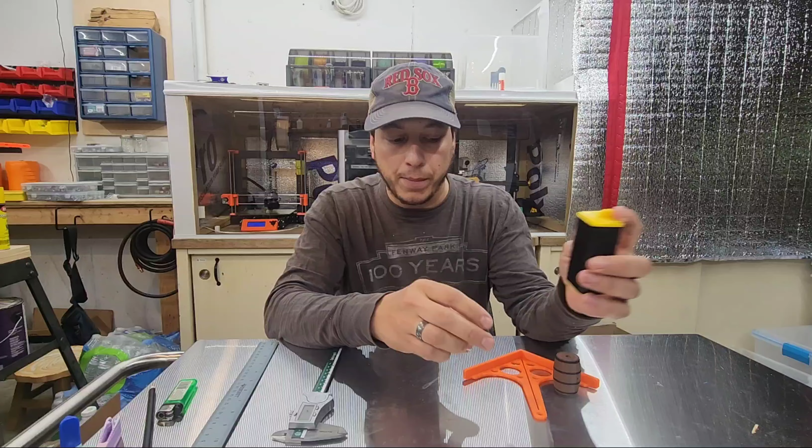You can always download files and print things with your printer. You can get a printer and print some pretty fantastic stuff that other people have designed. But until you get to the point where you're really thinking, what could I use, what could I benefit from, it's kind of like going into Walmart. You buy what's convenient, you buy what's there, and if they don't have what you need, you don't get what you need.

But sometimes a little bit of learning on something like Onshape and Tinkercad can really take you into a whole new direction of 3D printing, and really unlock the other 60% of the potential that these machines behind me have in making your life, your household, your whatever easier, more convenient, and just better. Let's get into it.

All right, so let's use a very simple and very basic example that makes my life easier: organizational things. These are very easy to design, very easy to print. They take minimal effort, and I'm going to show you guys exactly how I do it on the computer here in just a minute.

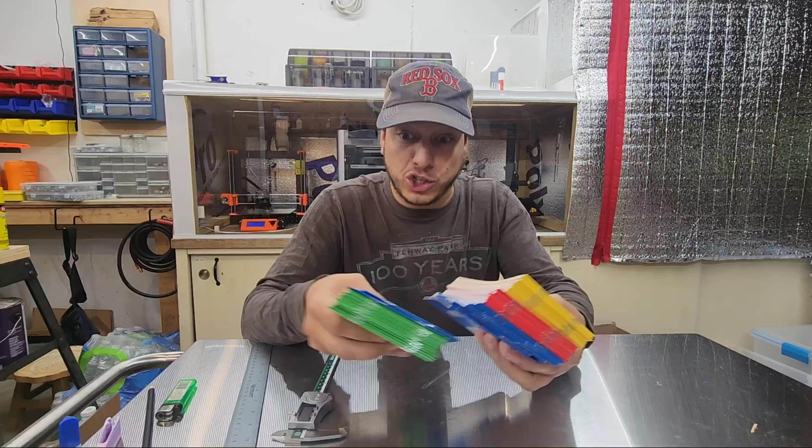But first and foremost, I've got a whole bunch of these learn-to-read books for my daughter for summer reading. She gets out of school and we're going to do a lot of summer reading. There's a ton of them, and what's going to happen? They're going to get shuffled up. That's not what I want to have happen. I want something that organizes these, keeps them sorted by reading level and everything else. Why? Because I can. That's the most important thing, is that I can.

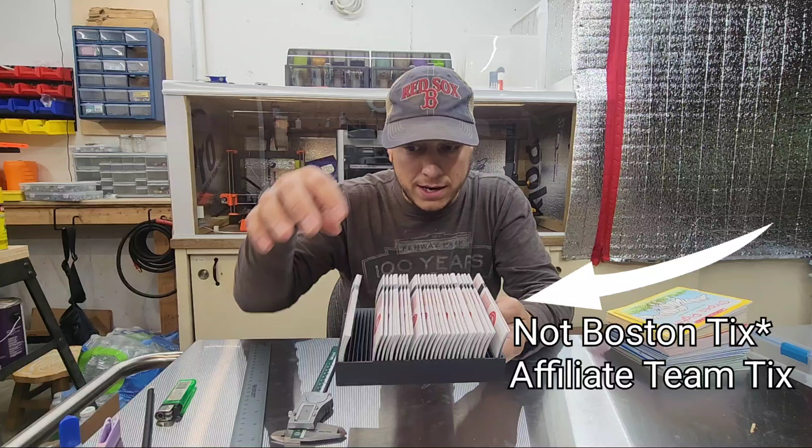So I got the idea actually because, you know, I'm wearing my Red Sox stuff today. Season ticket holders end up getting a tremendous amount of tickets for different games, and there's really no good way to organize it. You can throw them all into a bunch of envelopes and label them, but they're very confusing and difficult to go through to figure out where everything goes.

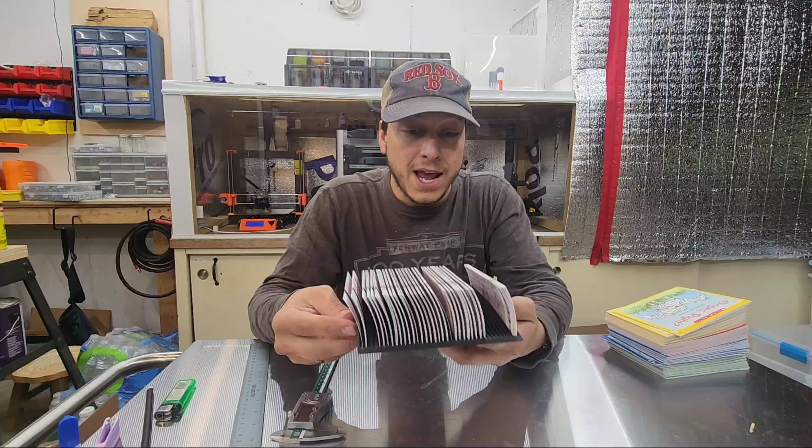I was able to design very, very easily and quickly print super inexpensively this little organizer that might not even be useful to very many other people. So I'm not going to upload this to Thingiverse, Printables, Maker World and things like that. But this is something you could design yourself very quickly and easily, and turn it into something that would work well for you. This little thing can go into a drawer in my house and make my life 100 times easier. Again, this is not something you're going to find anywhere, because it's literally made specifically for a need that I had.

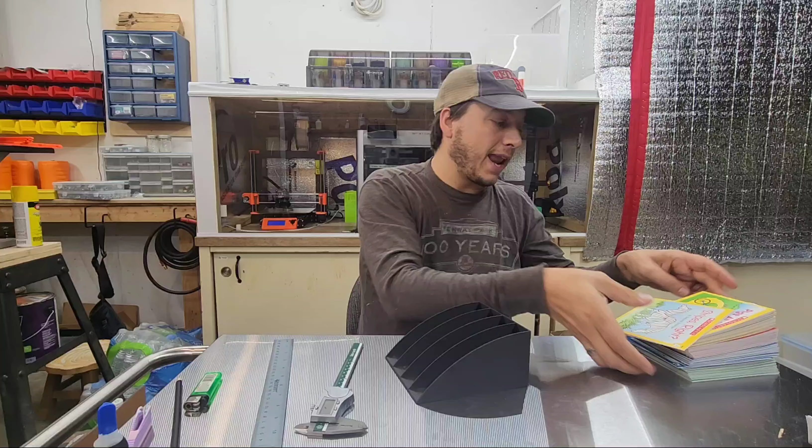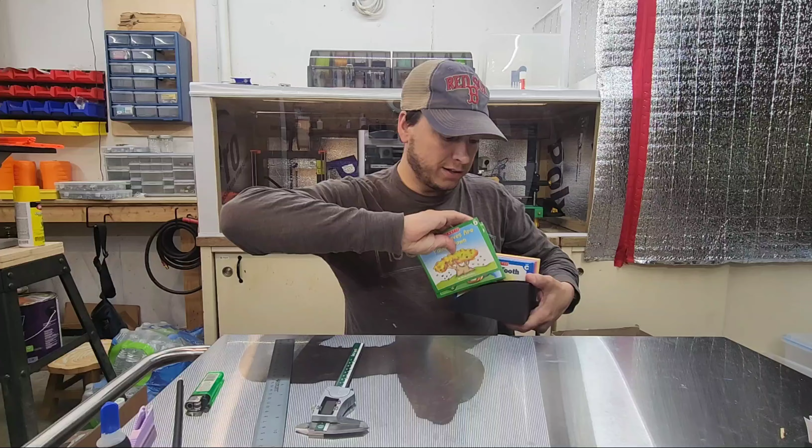So I took that same design and expanded it out, basically took the exact same thing and extended it up, made it taller. Now I'm able to actually sort books by reading level in here, and my young daughters are able to use it. They can see which ones go in which section, and believe it or not, kids are actually putting things back where they go. And this, on my bookcase, looks a whole lot better. Even with full-size bookcases, these are not falling over.

I've got a couple other use instances that I'll show you in just a minute, but most importantly, let's cut over to the computer. Let me show you guys very briefly what I'm doing in order to make these ridiculously easy organizing devices, which you guys could start doing probably within about 20 minutes of tinkering around with Onshape, which is what we'll be using, and get these things printing right now.

I've actually got a completely different version printing on this one right now. And over here I have a golf ball holder that I'm printing for a friend, because what I needed didn't exist, and with a little bit of Tinkercad playing around, I was able to make it.

I've actually got a video where I made a game ball, a softball holder for hanging on the wall, that teaches you how to make keyhole slots on the back of things. I was able to take that same exact thing for the softball, change the measurements, shrink it down, add a little bit of text on the front, and print this out for somebody else — and it's a golf ball.

Again, they didn't have what I needed, and it did not take much learning or training. I'm not experienced in this, I learned it from YouTube just like you can, and now I've got this printing here.

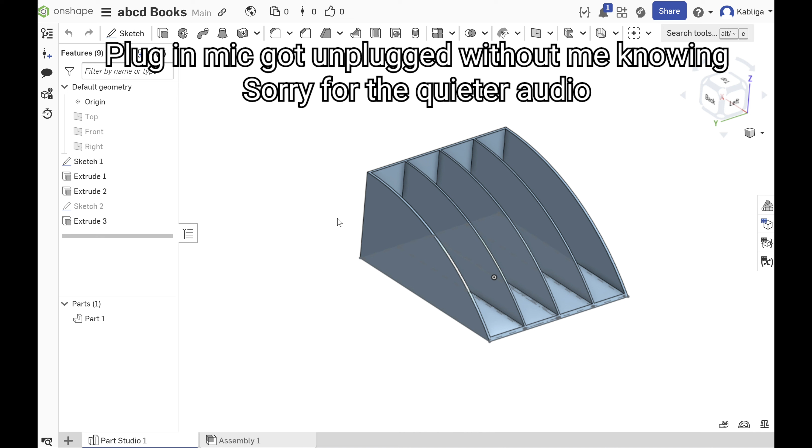This is the design of the book sorting organizing device that I just showed you guys, and let's take a quick look and see what exactly I did to make this happen. Let's roll back the bar up quite a few steps and see exactly what's going on.

So it started off with a very basic sketch. You'll be able to see it right here, where I measured the total width of the books that I needed them to be from front to back, and then the total width from side to side of having every single one of the books lined up with enough room in between.

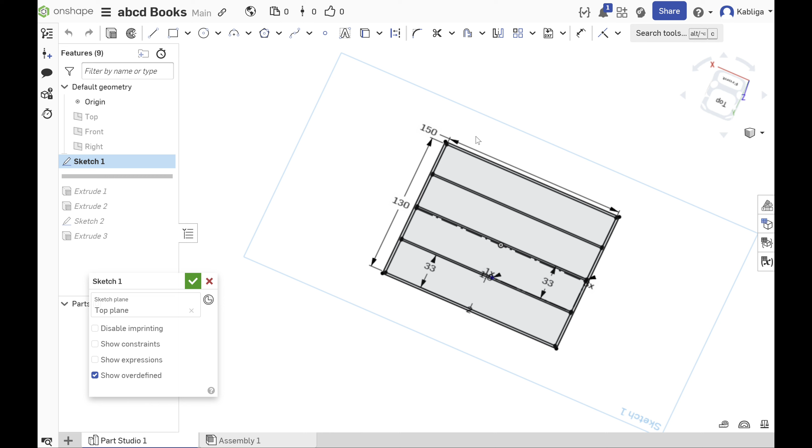I did use a line with an offset tool, and then I did a linear pattern to have this repeat. I ended up making them 33 millimeters apart, and that actually worked perfect for me. I did make one of them just slightly thicker because one of the sections of books was a little bit bigger. So let's roll this back and show you guys what happened afterwards.

The very first thing I did is I extruded the exterior perimeter lines, and what that did is give us a box with no bottom. So really it's more like a sleeve.

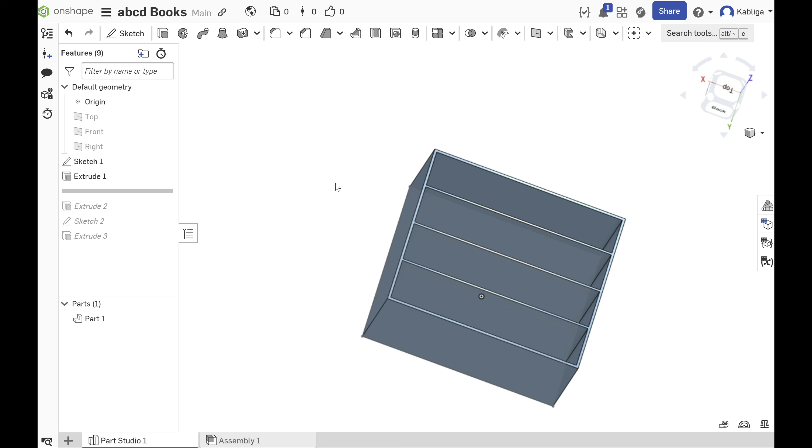Now I'm sure this would work for some people, especially on a bookcase, but it wasn't really what I was looking for. So then I extruded the bottoms of each one, only a couple millimeters, so I end up with a box that is a sorter box. And again, this could be enough for a lot of people.

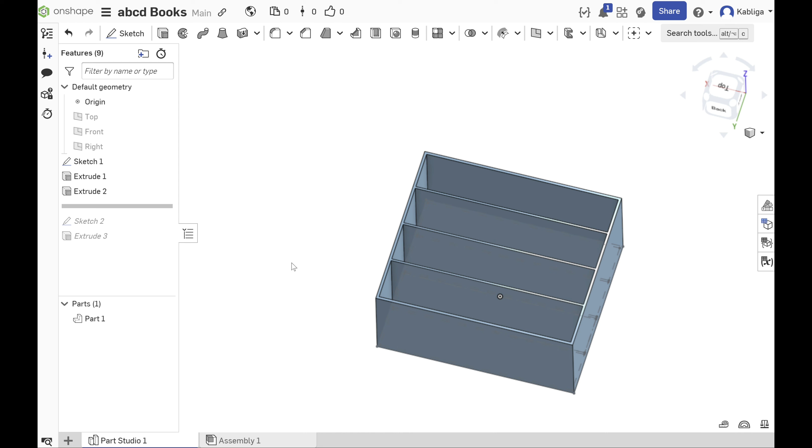This would hold all those books perfectly, but you wouldn't be able to really peel the front of them back and see what books they were, which would maybe make the kids a little less interested in reading them.

So I ended up adding another sketch onto the surface. Let's see which one I added it to. There we go, added it right here on the surface, and then I selected this rounded piece right here, and I extruded it as a remove across all, and there you have it.

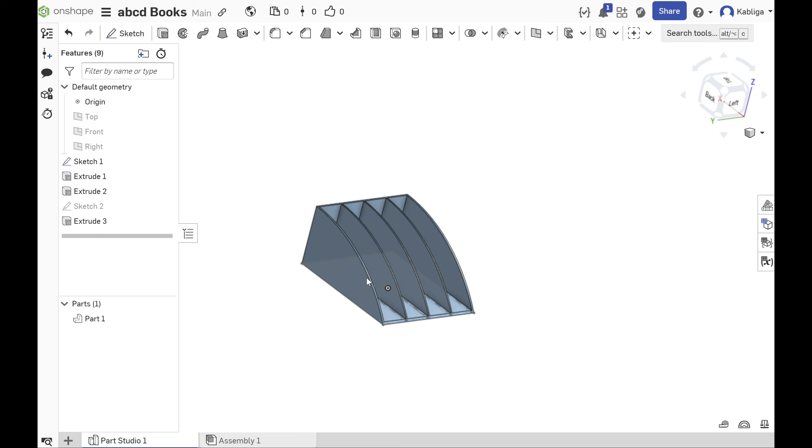So let's see this thing print, and let's take one final look at it.

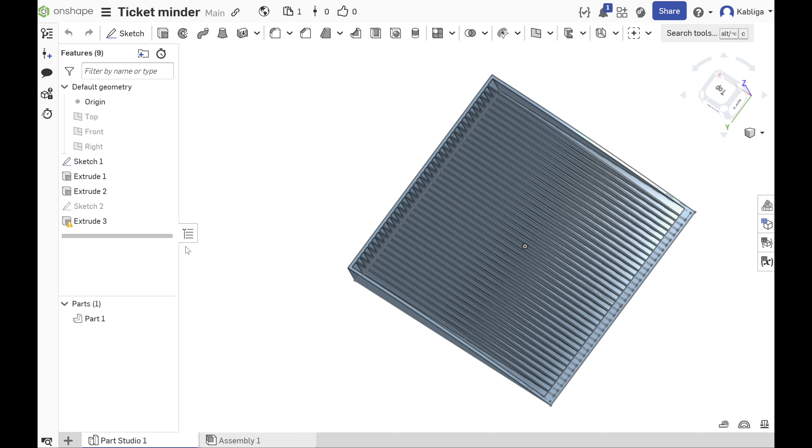Now keep in mind I was able to use this same exact design, and I named it Ticket Minder, so you could find it on Onshape if you really wanted to. I did basically the exact same process, the exact same procedure, except let me show you a little bit more on this one because there are quite a few more steps. Actually, it's the exact same amount of steps, it's just a lot more clicking.

So this one right here is divided, I believe, 34 times, with only a couple millimeters in between each one, because I have 5 tickets or 3 tickets to most all of the games. So I wanted to be able to just kind of sort them from one end of this to the other and actually be able to see them independently.

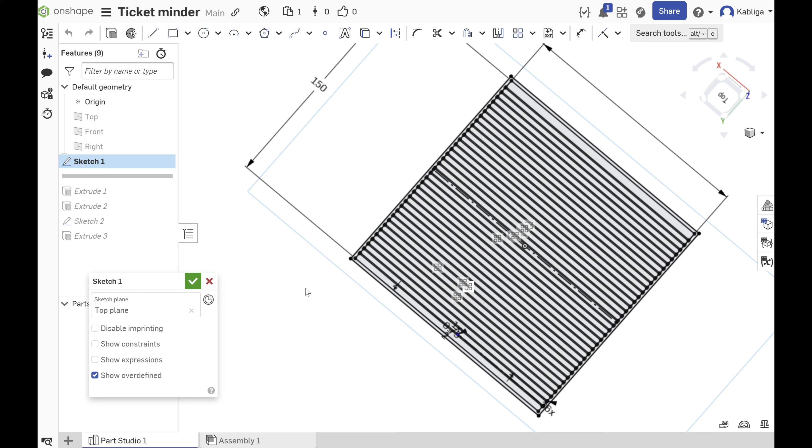And as I use the tickets, I can spread them out a little bit more, make it easier to use, and then I'll hold onto it till next year, so it won't be completely wasted after I'm done with this season.

After I did that, same as last time, I extruded the high walls. This is not going to do really anyone very much good, unless you're trying to filter something and you're trying to design a filter. This might work for you.

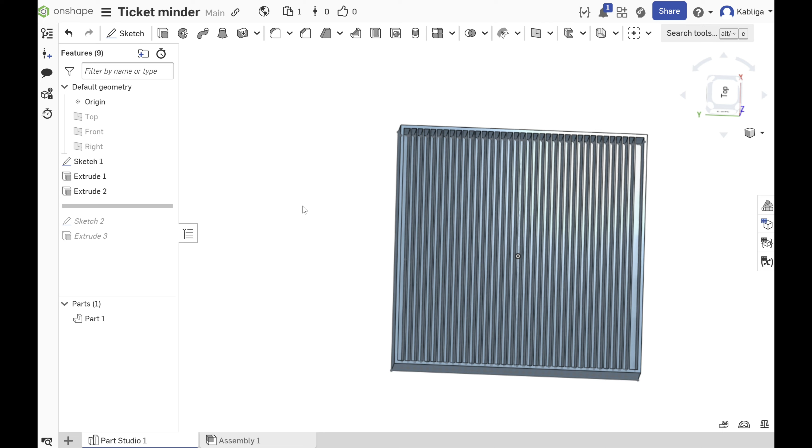So the next thing I did is I extruded the bottom. I went 2 millimeters in the opposite direction, that way it just gave one thick base for the entire thing.

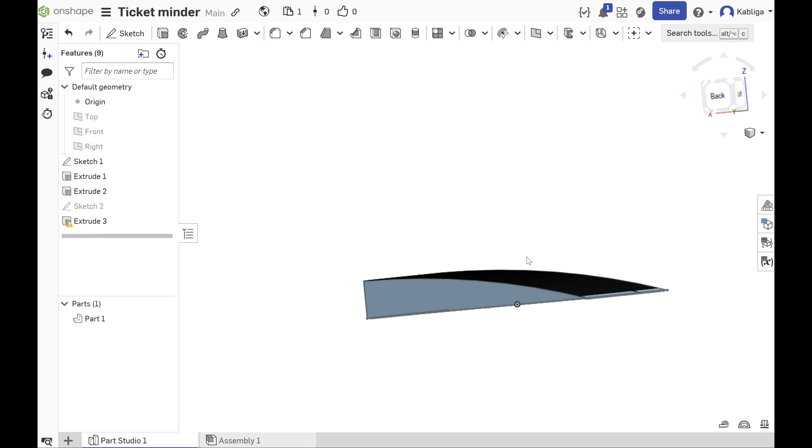And again, just like last time, I picked one of the sides, not sure which, and I added a sketch on it. Here we go, a sketch right there. And then I extruded that sketch all the way across so that again I'd be able to see from the side exactly what it is that I'm looking at, what day is the date of the game coming up, and what am I going to see.

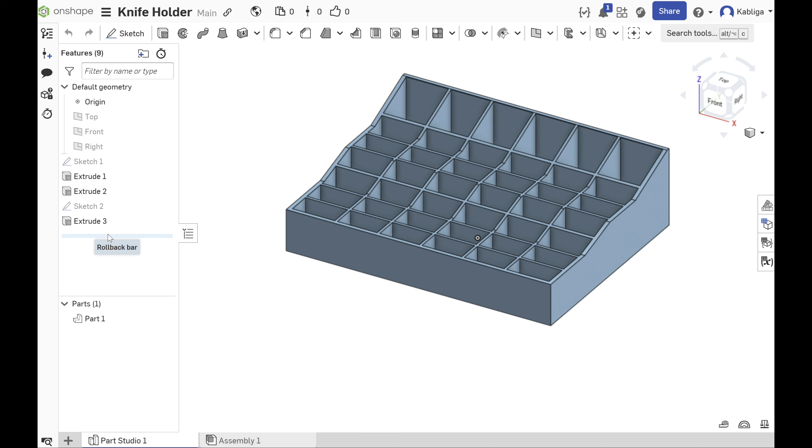I wasn't going to show you guys, but while I'm at it I might as well. The one I'm working on now is for pocket knives since I'm American, and everyone in America carries a pocket knife. So if you ever need a box cut open, just ask, we got you. This one's a little more complicated because I decided to make it more fun. I have enough of them that I wanted to be able to pick my pocket knife every morning, just like I pick my watch every day. To some of you that might be a foreign concept, but not to me.

So I have a couple repeated lines through here to keep this evenly spaced, with one of them being a little bit thicker, same thing going the opposite direction. I looked at all the pocket knives I have - I do not have this many, that is a lot, at least I don't think I do. I just wanted to have the space to expand if the time came.

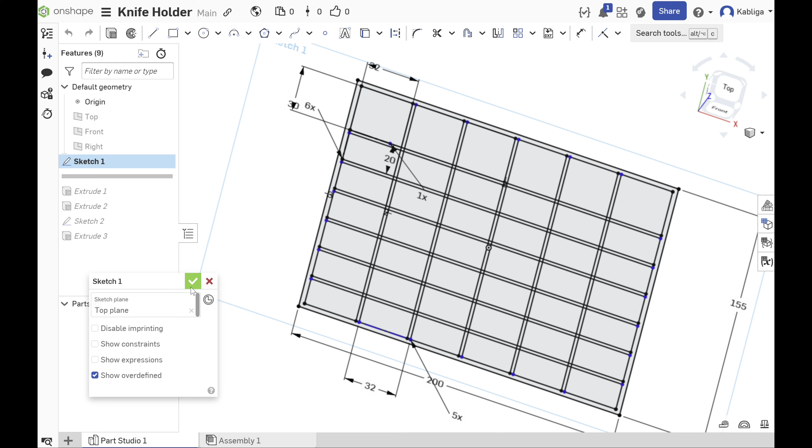But just like the other two designs, let me check off this sketch so it starts working. My mouse pad's really giving me some trouble here. And I extruded it - let me hide the sketch so you don't see all the wires. There you go, and I ended up with a bunch of hollow tubes.

Kind of looks like a mailbox at a school or something, but obviously a whole lot smaller - we're talking 20 and 30 millimeters sorting it out. Again, I did another extrude to bring the base up so that it actually closes it off and becomes a box. But that's a lot of wasted plastic.

It's not quite stylized - some of the pocket knives might be shorter, some might be taller. Same thing might ring true if you wanted to make this exact same box and use it for art supplies. Many other things could be sorted this exact same way, not just pocket knives.

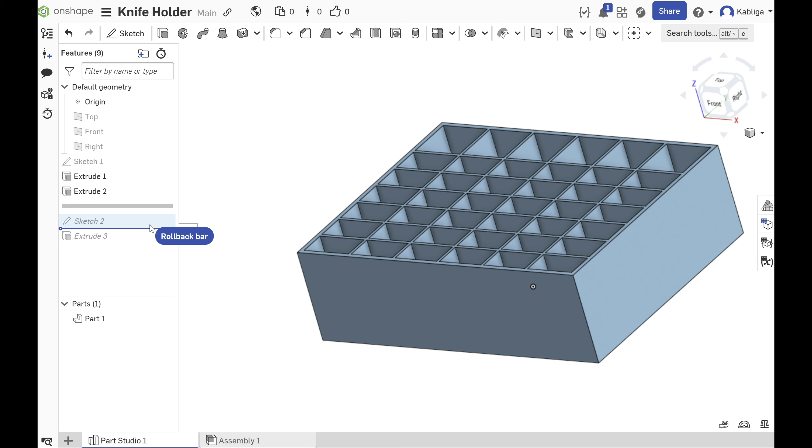So I put a sketch on the side of it - this time I freehanded it. I wanted to make it come down like a mountainside, and I didn't try to line them up exactly with these because I thought it would look better if it happened a little more naturally in between. Then again, just like last time, I chose the top, extruded it as a remove all the way across, and this is what we ended up with.

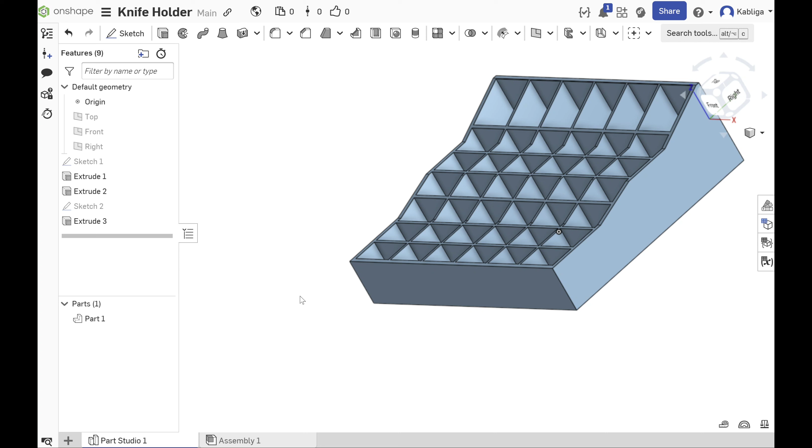So this should give me the ability to put shorter objects here, medium objects, taller objects, and then the really oversized ones I would never carry daily, back here as well. And again, this could be used for a lot of different things, art supplies and such. I think the bottom down here is maybe about 25 millimeters up to about 65. So if you were printing this exact same thing and wanted to put markers, pens, paints, whatever it might be, this might be a lot taller.

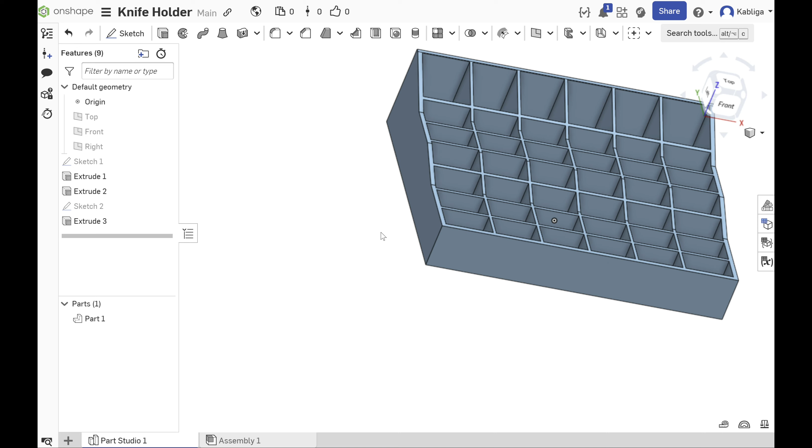But again, the point is we're using the exact same design concept for all of these, and we are making four devices that are going to make my life much easier for sorting.

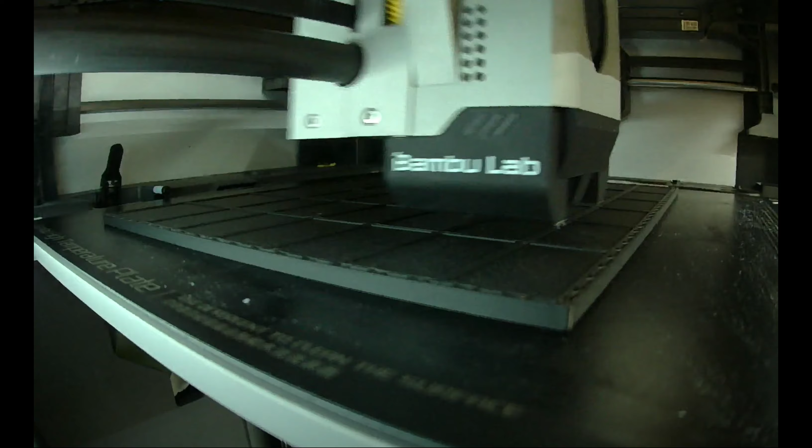And the very last one I'll show you guys uses pretty much the same concept - I didn't think I was going to show you until I actually got in here and decided let's look at it. This is a caddy for when you're done at the end of the day and need to take all the stuff out of your pocket. Got to get all the things out of your pocket, and where do you put them?

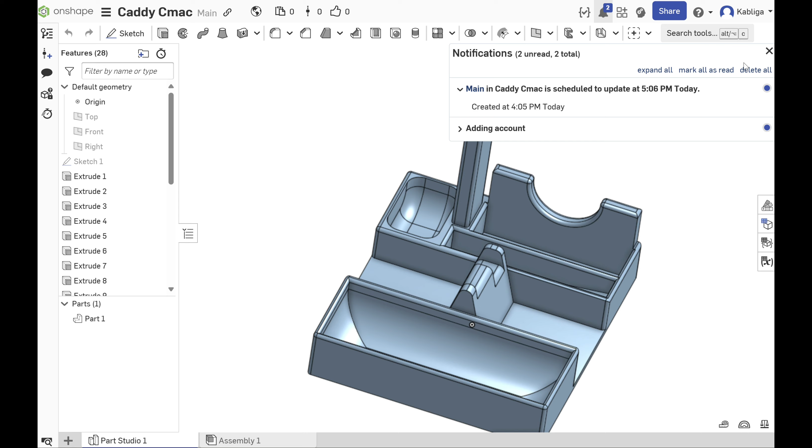So what I did is I discussed with my son what he has in his pocket every single day, what he needs to have in here, and we designed it around that.

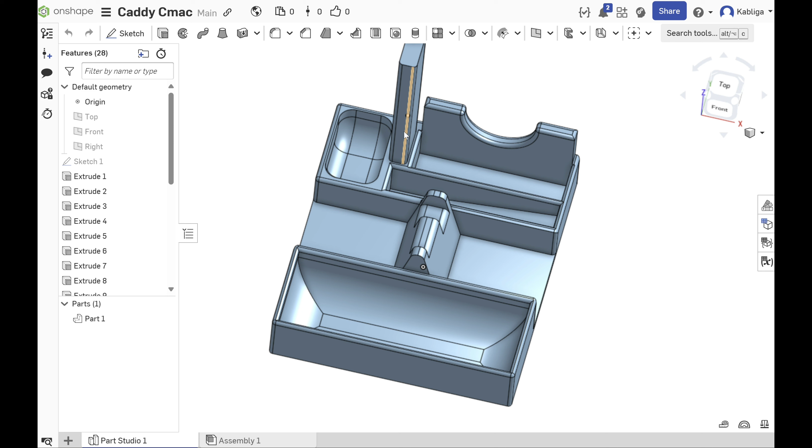For example, this rounded part right up here perfectly holds his headphones and holds the USB-C cable on the back side so it's easily able to charge while it's in the dock. Same thing with this - this is actually his phone mount, and the reason there's a cutout right here is because he has a pop socket, and we didn't want the pop socket to be in the way. We went the lazy way since it's not mine, it's my son's, and the USB port just comes out of the top. So one plug here, both devices can charge.

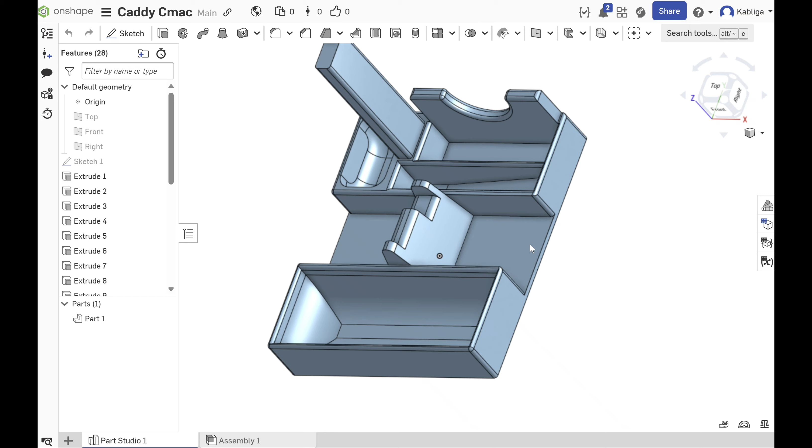This is a pretty standard design for eyeglass holders - if you wore sunglasses you could use those, but I myself and my son both wear glasses, so they go in here. And as I said before, we're American - even our children have pocket knives. This is a perfectly fit slot for his pocket knife, his whittling knife. He doesn't carry that every day, but might want to go out in the woods and whittle a knife and a stick.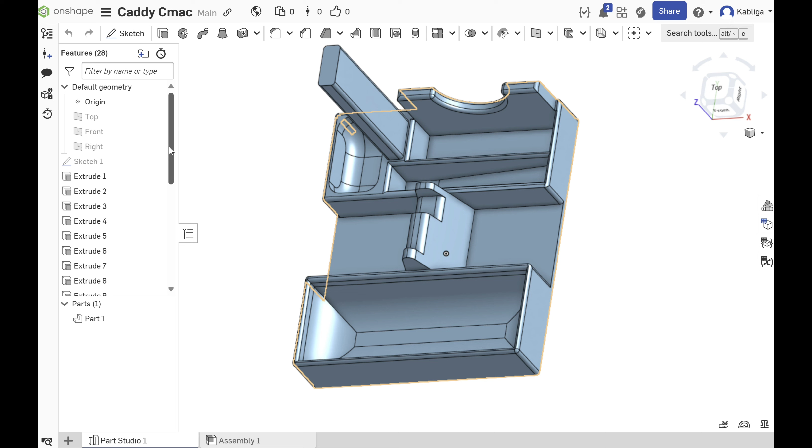And then right up here, this is kind of a throw-your-change-in-here, throw-whatever-else-in-here section. I've got the sides with a nice radius so you can easily scoop everything out. There's a whole lot more stuff on here because I made it a little more decorative since I knew it'd be seen a lot more.

For the most part, it starts the same way as many other things: with a sketch where we started with all the measurements and went from there to design exactly what he needed. Let me take a look at the sketch, and you can see we did exact measurements for what it was we were looking to use.

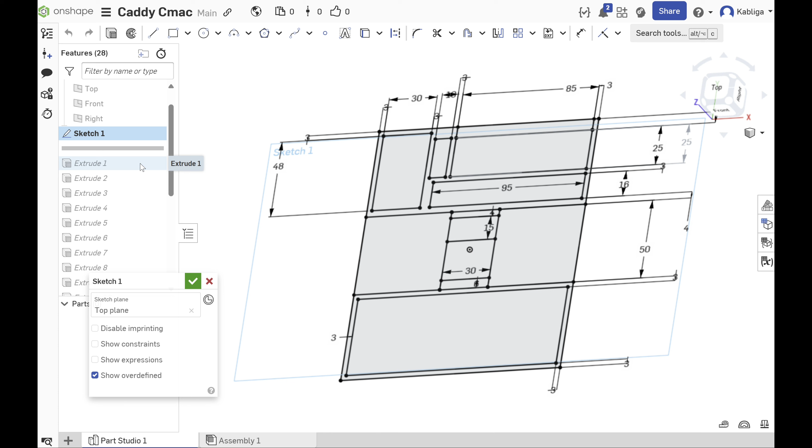After we did that, we were able to start extruding. We chose individual lines—got to select yes on the sketch—so individual lines were extruded in certain places in certain ways because of different heights.

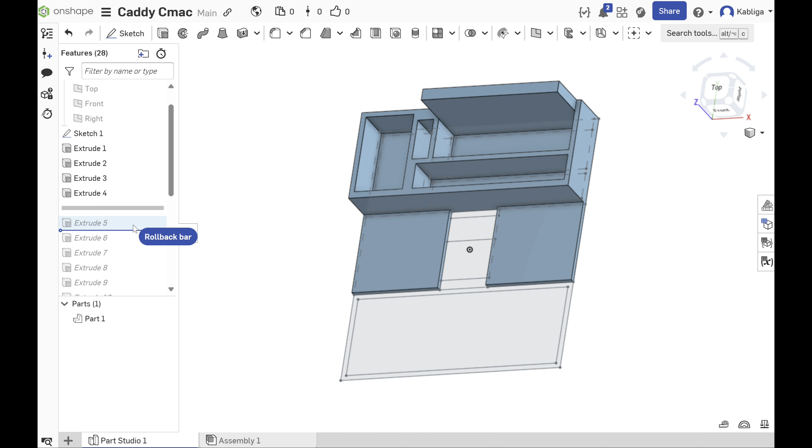I added the bases just now, as you saw, so now they are actually cups—actually holders. This one I wanted flat because they don't actually need to hold the glasses there, since the glasses end up being held here. There's a couple different extrusions in order for me to get the sizing just right, and glasses won't fit in that very well otherwise.

Let's skip down a couple more extrusions, getting all this done. Let me quickly tell you, this right here is to hold a smartwatch, but then he broke the smartwatch. So I have not quite added the upper part that will hold the smartwatch because I want to wait and see what he ends up using, whether it's just a basic watch or whatever.

After playing around with some chamfers a little bit, we were able to start rounding some edges. We were adding all of these different features to it that start to make it look a little bit better, make it look like something that's professionally made.

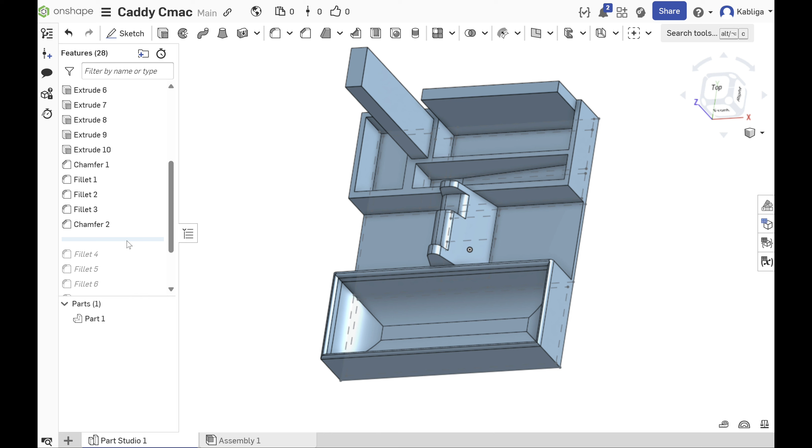I rounded the inside right there so it would hold the pocket knife perfectly flat, even though the knife is not flat. We skip way down here, and by the time we get down here, you'll see we're rounding all this stuff out. We've started adding the cutaway for the pop socket.

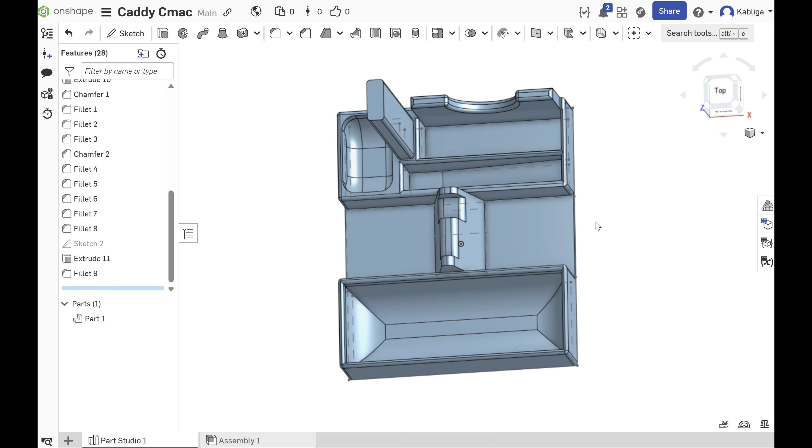Finally, when all was said and done, we end up with this item right here, which I'll show you guys in person. I haven't finished the top up here, but it gives you an idea that with pretty minimal design work—really just using a ruler, a caliper, you don't even need the calipers depending on how accurate you want to be—

I was able to design something that he's able to use every single day. He gets done with the day, he's able to take everything out of his pockets, throw it in these places, throw those pants back in the drawer or throw them in the laundry, wherever they go. Then the next morning he can see that everything's there.

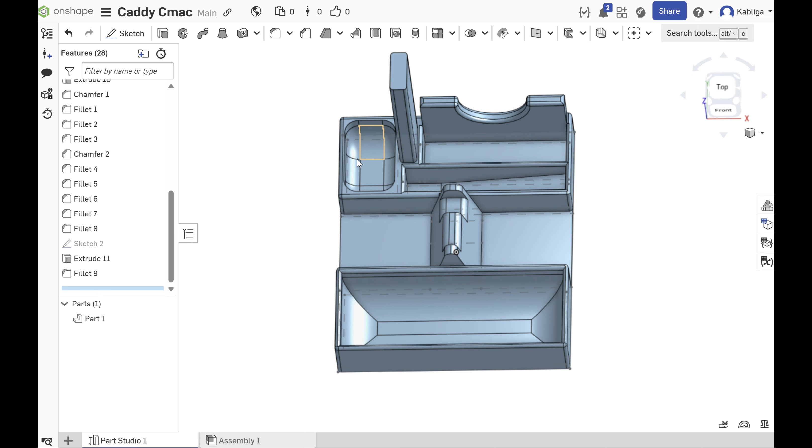And then we can also see whenever something goes missing. We can quickly see, where's the pocket knife, where are your glasses, because they're not on your face and they're not in their stand. Where are your Bluetooth headphones? Where'd you set them down? Did you lose them? So again, very minimal actual design work when it comes down to it.

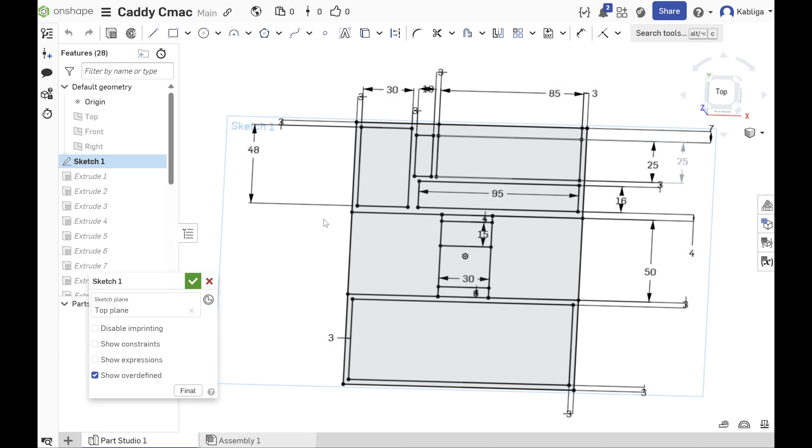I highly recommend that you really watch some Onshape learning videos. I actually learned using the Teaching Tech videos, which I've linked to many times before, and I will keep referring people back to it because it definitely changed my usage in 3D printing—from just clicking other people's work and printing, to really being able to customize it for what I need and what's going to benefit me in my daily life.

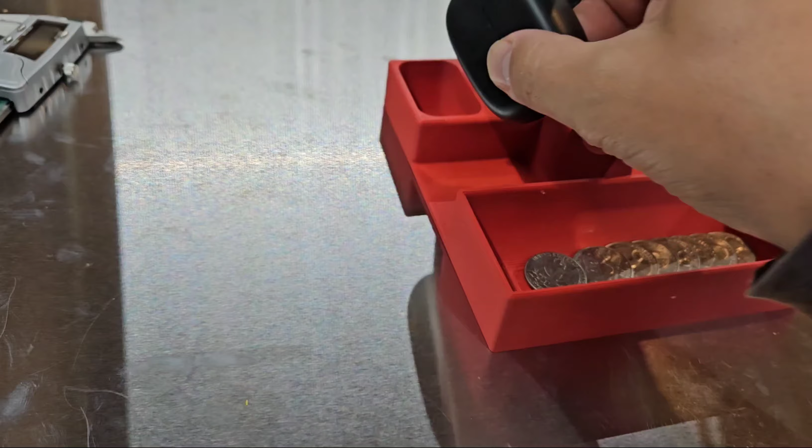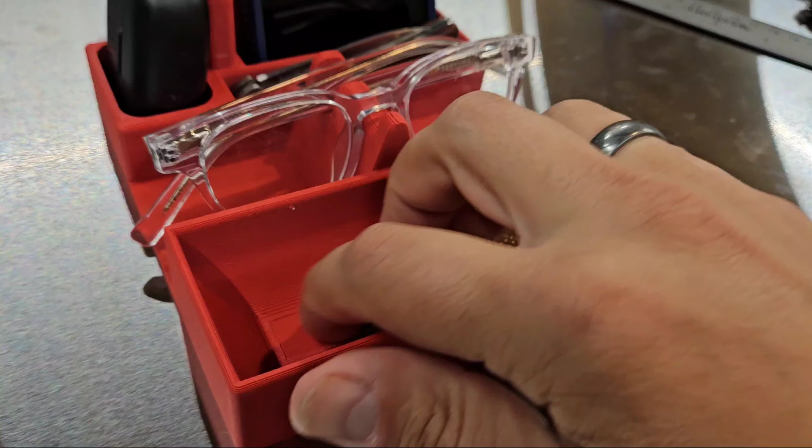Just a quick capture to show you guys how it actually works. It's sloped down so it holds this level, got the hole in the back so the pop socket fits in there, and of course, like every kid, broken screen—headphones fit perfectly in here. Turn it this way so we can get the charging out of the top and out of the back. Glasses, perfect fit down in here, and whatever it is, easy to scoop out.

All right, everybody, it is late, but I just got notification that the Bambu is done printing, and I just wanted to point out a couple little things.

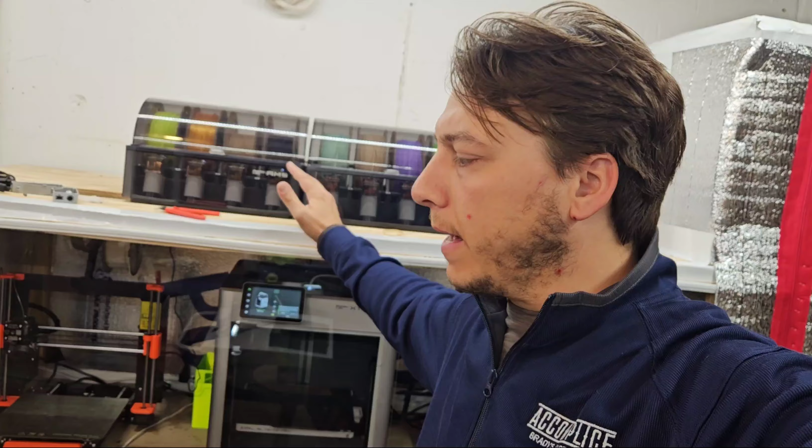One, it's done, but it's extremely stringy, something I've never really had an issue with before. I've had this enclosure going for a while, and you can check my previous videos to see how well it's been working. I've got a drying tent with a heater that's been running forever. Before, this was upstairs, not in the basement. Basements are moist and damp with high humidity. Even though I run a dehumidifier keeping it around 50%, when it was upstairs with air conditioning running all the time, I never had an issue with filament being stringy.

The heater went out in this drying tent, so I'll be recording another update video on the dry tent I made, covering what's happened since the heater stopped working. Now I've got to replace the heater because the stringiness has been astronomical. I did a couple other test prints since that were stringy as well, and now I'm getting to the point where every color is doing it, everything I'm pulling out of there is doing it, but anything out of a fresh package is not. So the dry tent was working, I need to get it working again. Stay tuned for another video on that.

But let me turn the camera around and show you how this knife block is supposed to work.

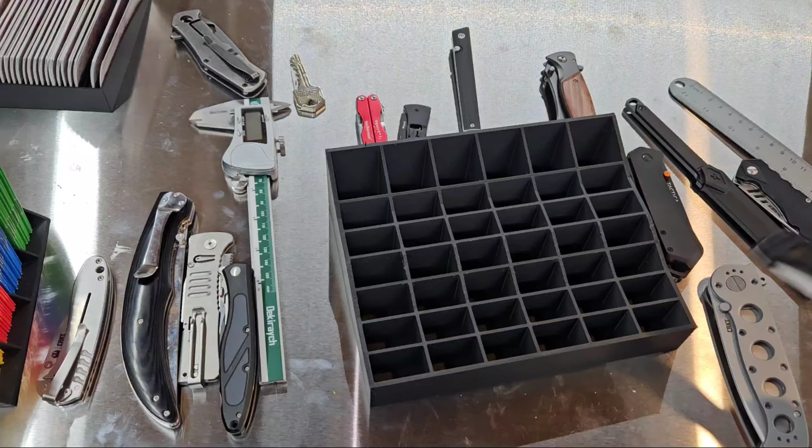All right everybody, so the whole point of this was, you know, I am an American — we carry lots of knives. We don't always carry them all at once, but we own a lot, or maybe we only own a couple but they're special to us. Having a nice place where we can put them and organize them — goodness gracious, it seems like I might actually have enough to fill this thing up. I might be printing a second one of these.

As you can see, I can find different slots — where do they fit? There's the thinnest place that it fits, makes it look good, put it in here. What I should end up with is a nice little organization system where, like I said, I wake up in the morning and pick out my watch for the day — oh, that one doesn't fit, doesn't have a place, oh there we go. Pick out my watch for the day, pick out your belt for the day, pick out your pocket knife for the day. If you don't have a pocket knife, lighters would fit in here, tools would fit in here, whatever else you wanted to use.

But there you have it, guys. It's not the most beautiful thing I've ever built. In fact, I'm probably going to reprint it, make it quite a bit taller so everything holds a little more upright, maybe change some of the spacing here and there. But it's definitely going to work for what I want it to do for now, so I'm not in a rush to reprint this. I'm glad to finally be able to see most of them all in one place.

This is just more to show you what can be done when you decide to start 3D printing things on your own. If there's one thing hopefully you learned, it's that if you stay up really late waiting on it to print, you're going to be tired. If you have enough pocket knives to fill up a caddy like this, maybe you need to record a video about knives — the best ones, the ones you don't like quite as much.